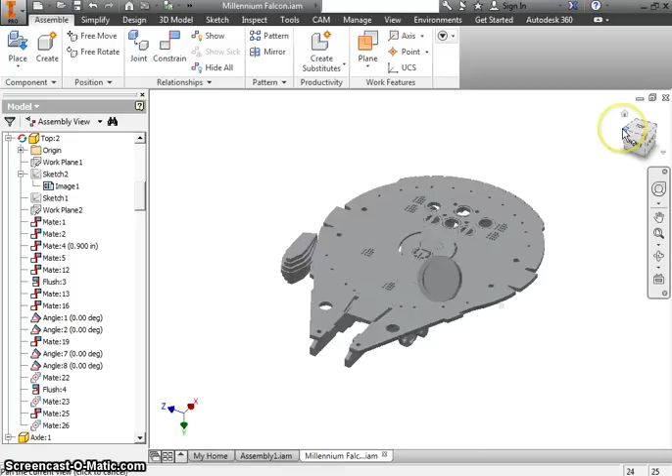So let's say that instead of trying to go for distance or speed, you want to go for looks. Maybe you're not happy with a regular looking dragster, so you want the Millennium Falcon with the Rebel wheels. Or maybe you're a Batman fan and you want the Batmobile, complete with machine guns up front.

I didn't just draw these things up off the top of my head. I found a way to cheat the system a little bit, and I'll show you how I did that.

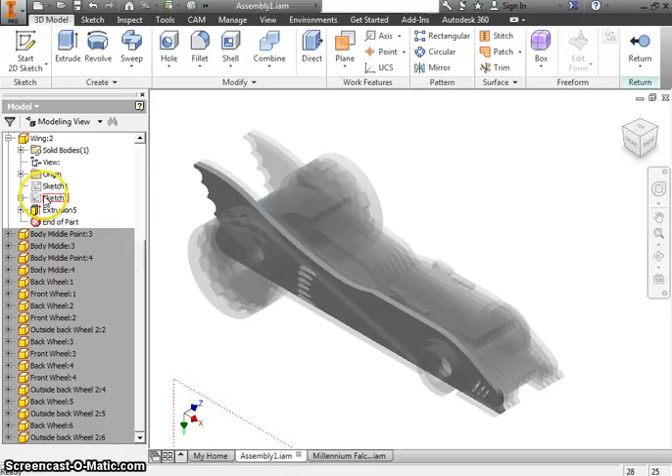So if I pick out one of my parts, one thing you'll notice on sketch 2 here, I found on Google some kind of drawing that showed a side profile. In the case of the Millennium Falcon, it showed not just the side profile, but also a top view.

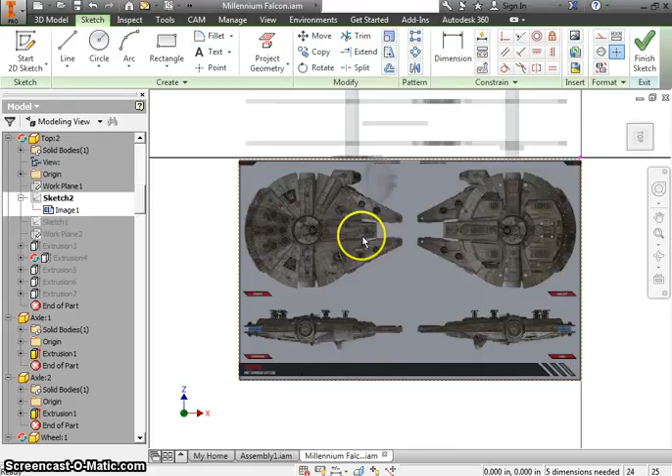Top, bottom, left, right. So I could come in here after I dropped in the picture and sketch on top of that picture whatever I wanted to draw. I can make a circle about the right size, get it lined up just so, and then make some modifications after that. Let's say I want a rectangle that pops out there, maybe a triangle that starts here, ends up over here somewhere.

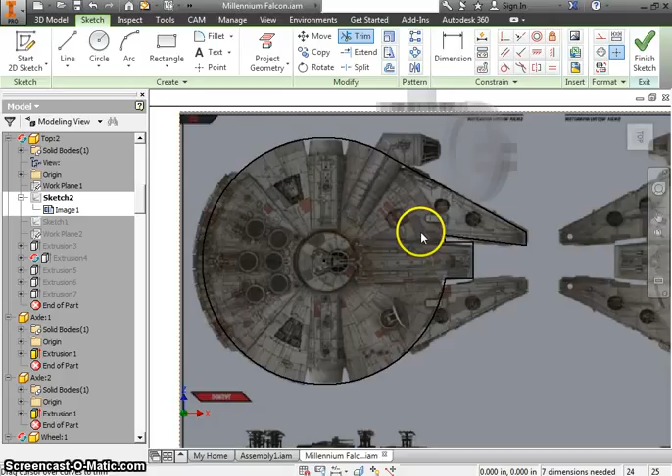This is going to take a little bit more trial and error. It's going to take a little more trimming and getting things into place. But you're also going to have to make sure this is all going to fit. You can kind of see how this is starting to come out.

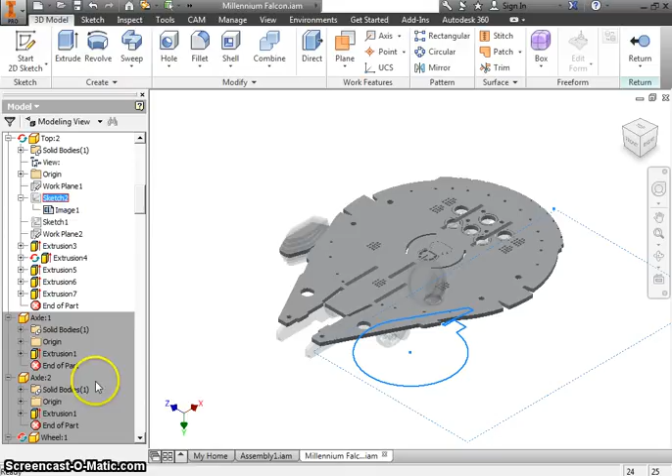And if I went to extrude for just this one part, hopefully it'll do this. It might not like that at all. Nope, didn't like that. I'd have to make this visible. There we go. I could add material to that.

So let's cancel that for a second. Let's undo everything I just did, and let's just start a brand new part.

2D sketch right here. So let's say I go to Google and I want to make the Ghostbusters car. It's easy to get distracted by all these pictures that look kind of like what you want. You really want a straight-on view though, so I like to put in the word 'profile.' That way I have a better chance of getting one of these views.

So let's go ahead and save that, and I'll just put this in my downloads and call this Ghostbuster. It's the Ecto 1.

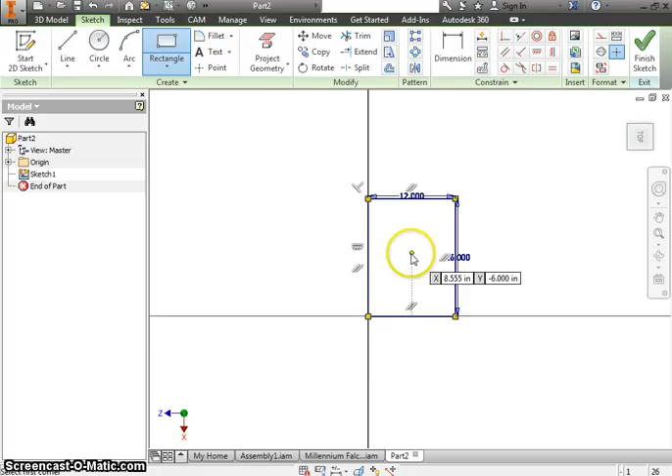Go back into Inventor. Here, I'm still going to start off the same way as the other one, so I have whatever size sheet you're given for the year. Let's say it's a 12 by 6 sheet. This is all the material you're being given.

So after you have that, go up here to where you have your image. Actually, let's cancel for just a second. Let's extrude this, so you have the 0.125 — typically it's going to be an eighth inch. I might find some thinner stuff.

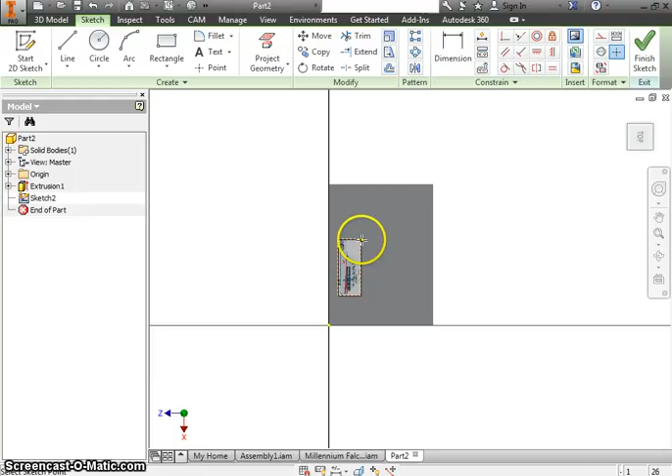We'll see. We'll make a new sketch on this, and now that we have that, we're going to put in a new image, and I put that in my downloads folder, Ghostbusters, and now I have a picture.

If I want to make this bigger, I can just grab a corner and drag it. I can also choose to dimension it as if it was an actual shape. So if I wanted this to be 5 inches, it's going to scale everything to be 5 inches tall.

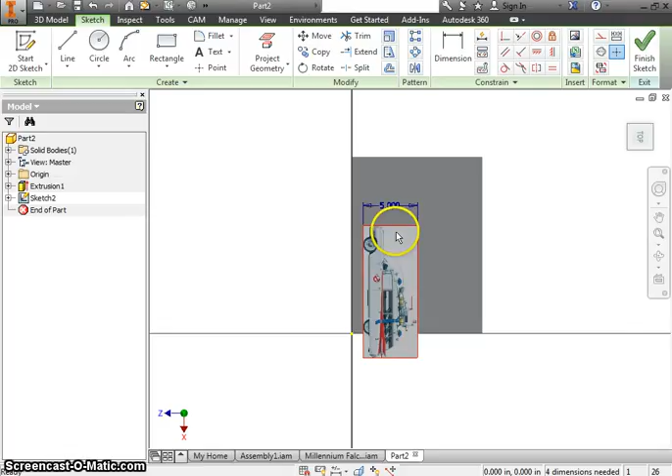Let's click and drag, get it about where you want it, and from here you can figure out some other things about it. If I want to just focus on the wheels, I can say, alright, there's my center. I still have to use the same requirements as everybody else with the wheels, so the dowel rods I'm using, 0.625, may not look exactly like these, but it'll be close enough.

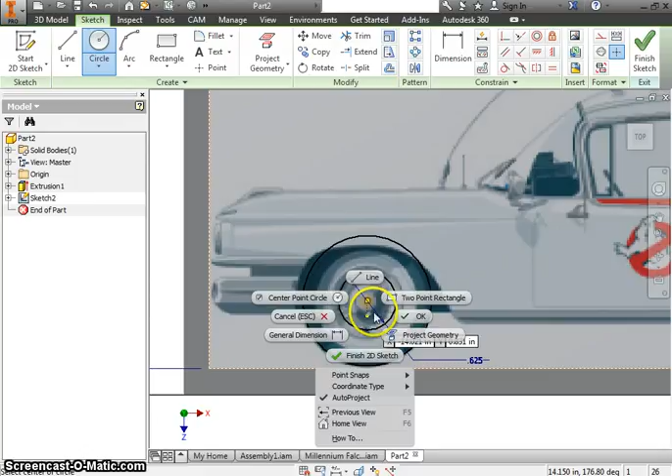Okay, after I know how big the wheel is, I can assume the two wheels are the same. I can just choose to click and drag this picture and make another part of the body. So now I can just focus on this side here.

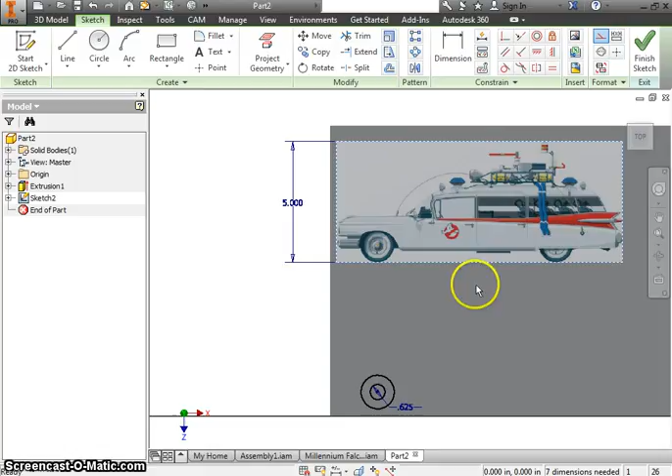If I want to add depth to it, I can make the middle part where all of this stuff is a different outline than the outside part, like what I did here with the Batmobile. So I wanted this body to be lower than the rest of it. I didn't want it to have the same shape all the way across like this, although that still would have looked cool. I think this looks a little bit nicer.

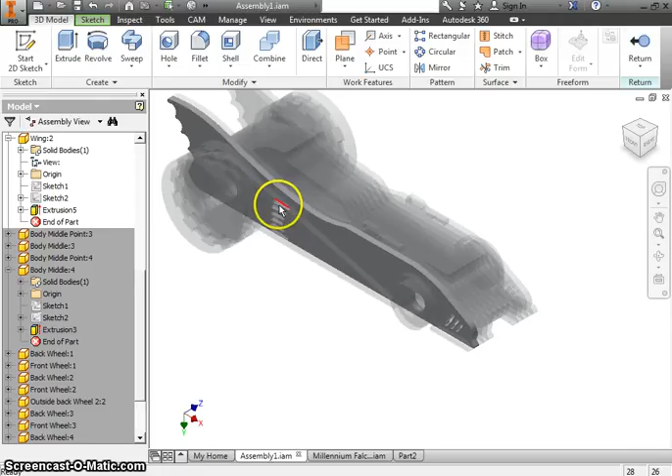So I have one piece that just has the machine guns on it. I have another piece that just has the body on it. I have another piece that has these little air intake valves on it. And some of it ended up getting covered up, so the fenders covered the details I put in over here. So I might go back and change that later.

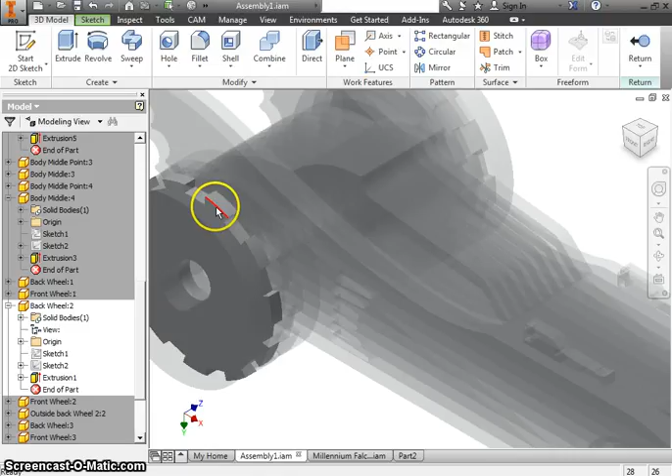I chose to make the wheels instead of just one thickness. I have 1, 2, 3, 4, 5, I think, wheels in here. And I added some texture to it by having one of the wheels have a shape cut out of it. And when I went to assemble them, I just took the exact same wheel and gave it a little bit of a turn, so that those would be in between.

So these two are the same. That one's just turned enough that it's right in between the two. And as I go to put this together, I just hot glue this all up as one big blob, one big fat wheel in the back.

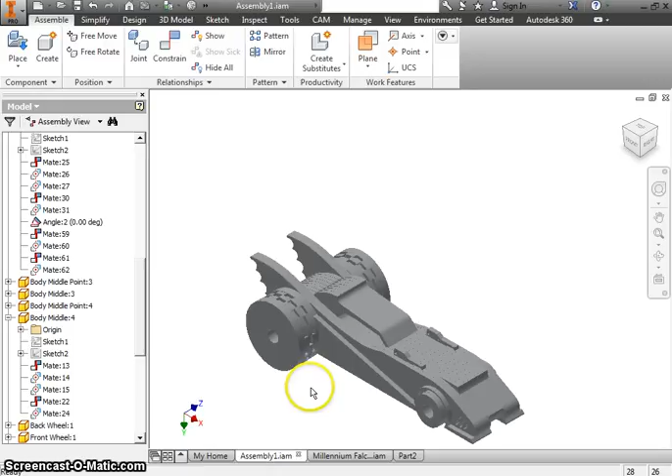Okay, you do still want to make this where it can be powered by a rubber band. So you still have to have something in the middle. Let's finish this sketch so I can show you.

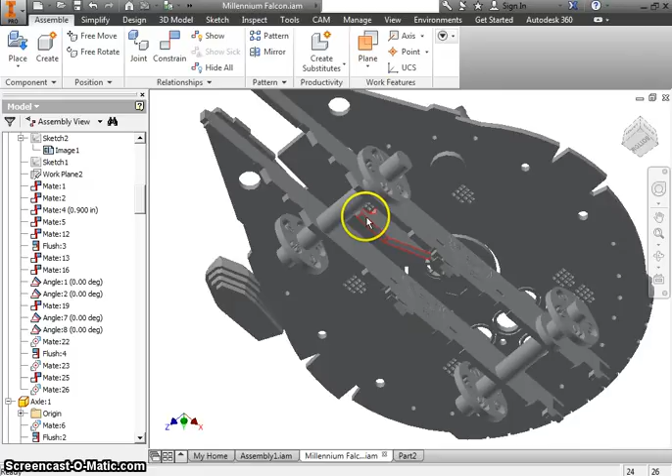You do have to have something here that's going to hold on to the rubber band. So that was my catch on the Millennium Falcon. And then I had something on the axle. I think that's actually the something. Let me see. Yep, that's my hook on the axle to grab the rubber band.

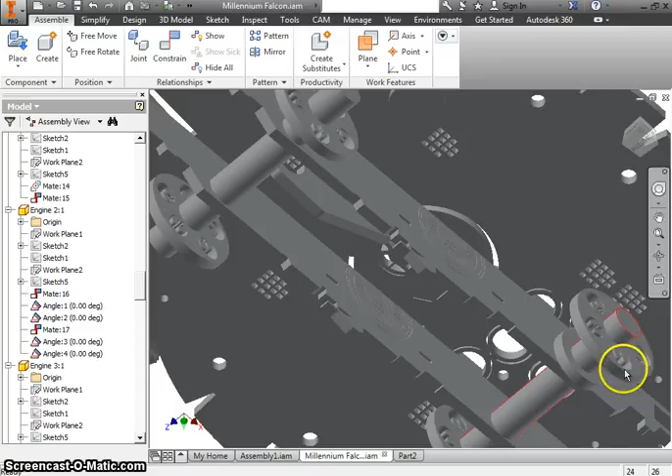Just got pushed to the side for some reason. Normally that'd be in here. If you look on my actual one, you can see it. So that as I go to wind this up, these wheels will wind, and then when I set it down on the ground, they would unwind and hopefully push the car forward.

I will warn you, if you go with a nice looking car, the wheels are oftentimes too small to actually push it forward, and the rubber band unwinds just a little bit too fast. So it's not very impressive as a speed demon, but it does look pretty cool if you're just cutting it out to put on your shelf. So that's my bit on that, and good luck to you.